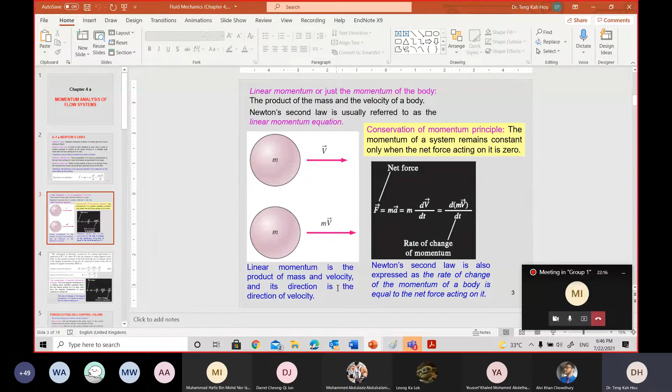So all these things about the theory, you need Newton's laws, first law, second law, third law. And of course, in these momentums, we apply Newton's second law. After that, we need to know what the energy changes are in our engineering application, so they use the conservation of momentum principle. This is general information for this chapter.

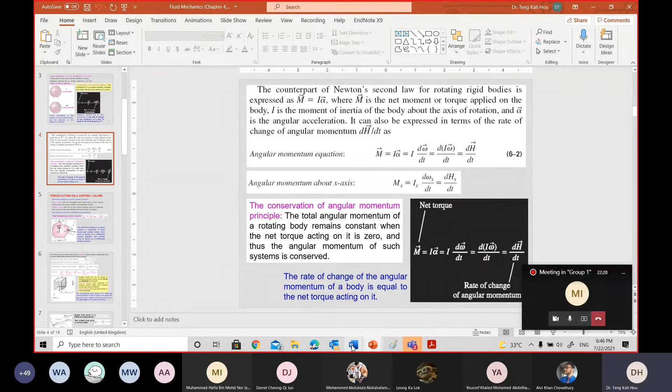So from there, I passed the angular first because we are going to go through that later. So as I mentioned, when you got the momentums, conservation of momentum, definitely the case will be put into linear and angular. I did explain to you last class what makes it different, because in the question, it wouldn't directly ask you please calculate the linear momentums for my case, or please calculate the angular momentums for my case. When you look at the question, you need to identify whether we are talking about linear momentums or angular momentums. I think I highlighted that in one of our previous classes, am I right?

So one very good example is this example, am I right? So we've gone through this example. This kind of question can be asked either as linear momentums or angular momentums, am I right? Depends what the question wants. For this case, they want the bending moments, so these keywords give you the idea, oh, I know this is angular momentum. But if the question asks something like anchoring force in between, just like this, my anchoring force determines the gas pressure or whatever, or the anchoring force needed to hold or whatever inside this system, all this will lead to your linear momentum.

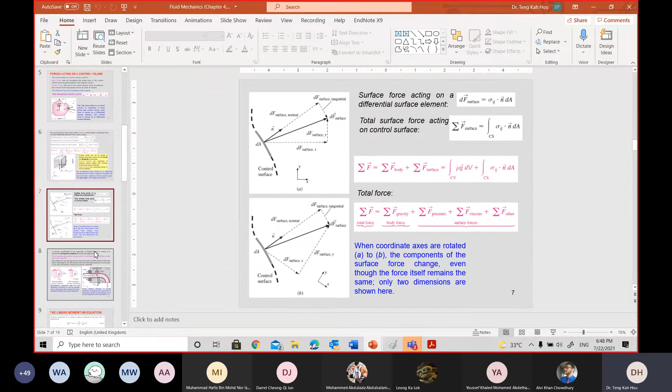Okay, so just quickly go back to that. And as I said, I don't expect you to derive the thing, so don't worry about that. But what I expect is that you need to understand the system, for example this. Have you gone through this? Yep, I think we've gone through this, right?

But in this case, I want to highlight that my pressure gauge 1 and pressure gauge 2 have gravitational effects, so it's pointing down. Make sure you are familiar with all the directions of the forces, and not all the time can your questions ignore the gravitational force. Do you get what I mean, class?

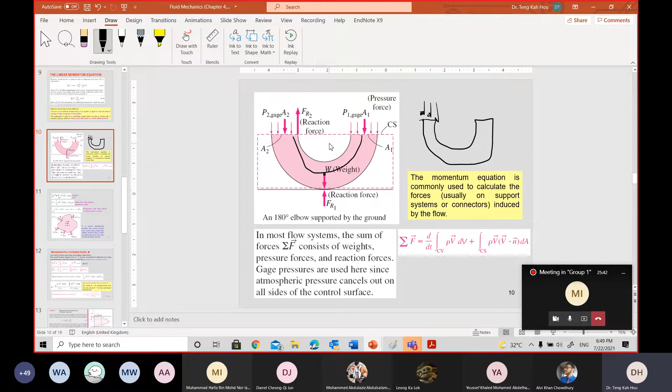Yes, sir. Yep, so in case you got something like this, you need to be careful that even though this is your inlet, let's say coming in from here and going out from there, your outlet pressure will be a negative value due to the gravitational force. So these kinds of things you need to analyze and understand the condition. But if the question mentions, just like your tutorial question or sample question, to ignore the gravitational force or whatever, then of course all these things will not affect you, you just follow whatever that is.

Okay, I'll go through this later on very quickly. So again, just to highlight that all the forces must be a summation, just like in this case you've got 1, 2 inlets and 3 outlets, so all the things must be in a summation condition. Okay, no question, right? Okay.

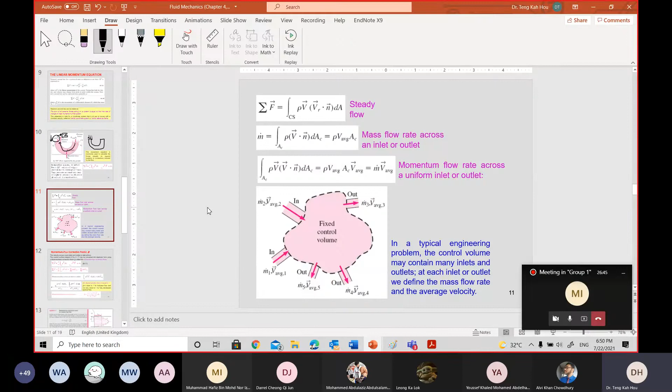So continue. And this is the beta I mentioned, so this is the formula you need to be aware of. In case your examination asks and this is not given, make sure you know what the requirements are for the beta integration. For example, in this case, you need to use 1 over Ac integrate V over V average or whatever. So make sure you know what this is and how you get the beta. I think we have gone through the discussion very well.

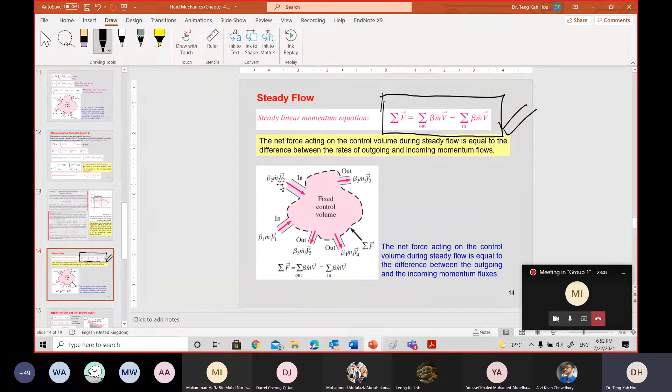Okay, so again this is the thing I highlight, this is the thing you must know. And why all these things? That's why for those who have a very strong static and dynamic knowledge, you might get confused, because whatever force is working here, to obey the momentum equation, everything must obey these rules, which slightly goes against your dynamics condition, right? And for those who have started, I guess you get what I mean. But remember, always remember to apply these rules when you want to calculate the system energy. Okay, so this is done, and this is a sample we've gone through. So, yep, for linear, is that clear?

For the linear momentum, is that clear? Any question you want to ask?

One question. Can you go to example 1 of the slides? The first example where we used to find beta. I'm only confused about there are two V's. One is V with the vector sign, the other one is also V. What are the names? You see, we have two V's at the top, so which one is what? I'm actually confused, it's all good, but that's my question.

One is V average, one is V. Both of them are velocities. Yes, both of them is velocity. So what this formula tells you, this relates the velocity using the average velocity to tell you the whole story. So it's a relationship between the velocity average, how it's moved, and how the radius changes your final velocity.

Both velocity, yeah, both also velocity. But because this V is the overall parabolic shape, am I right? So they need information of how the things move and how the radius change. So it's a relationship of all these things that contribute to your final velocity profile of your liquid.

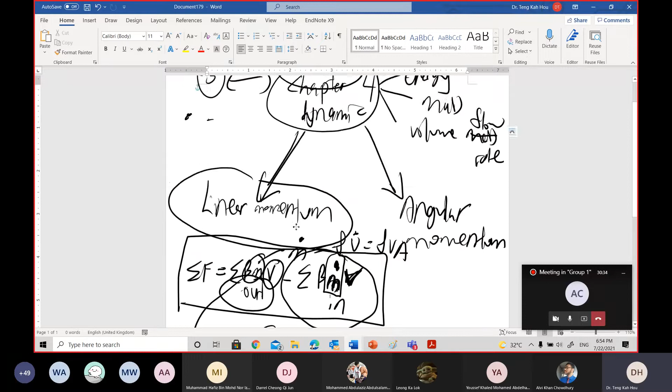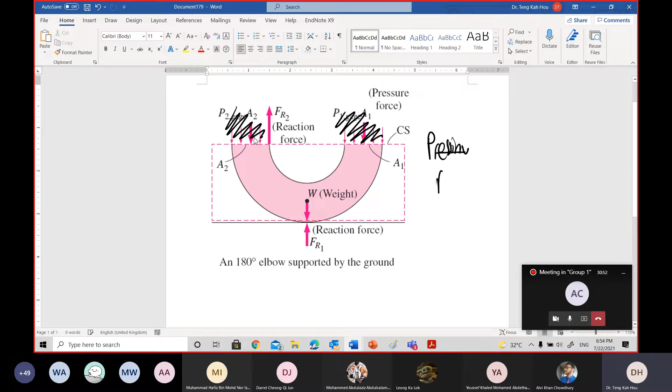So if the question, just assume this is non-marked, because this diagram already gives you, assume it's not given. If the question asks, I got pressure inlet over here, and I got pressure outlet, let's say equal to 10 kilopascal. My pressure outlet equal to 20 kilopascal.

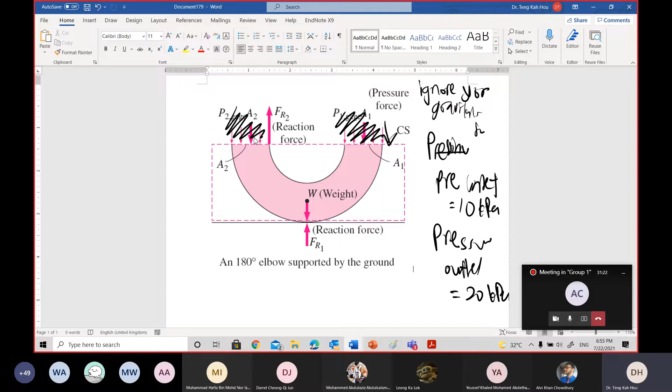Okay, so if the question mentions ignore the gravitational force, so your inlet will go here and go out. So your P1 gauge will be pointing down because it's inlet this direction. Going out, the P2 will point out, if the question asks you to ignore your gravitational consideration.

So second case, if the question didn't mention you can ignore all this gravitational force, so your P1 will be, as usual, against your inlet. But your P2, when you're going out, your P2 will still be pointing down, just like this case, because you need to consider the gravitational force.

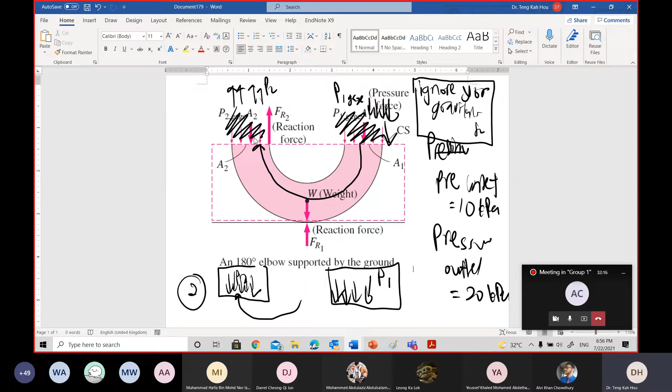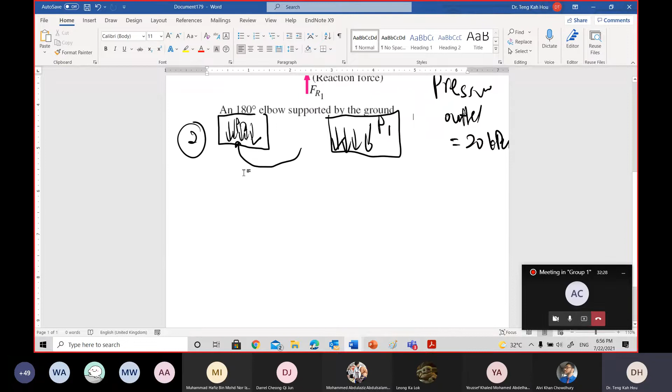Do you get what I mean, class? Yes or no, class? Yes, sir. Yep, so this is the thing, as I said, is an analysis of your understanding, just like this question. Okay, do a quick one.

Right, so for this, what they ask you to ignore. Okay, because it's mentioned going in from one direction, right? And they didn't ask you for the outlet pressure. Okay, they didn't ask you what is my P2 pressure, am I right?

If the question gives you also my P2 pressure is equal to some value, let's say what the value they're given here. Oops, let's say it's about 20 kilopascal. Okay, and the question says neglect the gravitational force, so your P2 will point it outwards.

Okay, so in case they didn't ask you to neglect, so your P2 will point it inwards due to the gravity. Do you get what I mean, class? Yes, sir. Yep, so, but again, don't worry on that.

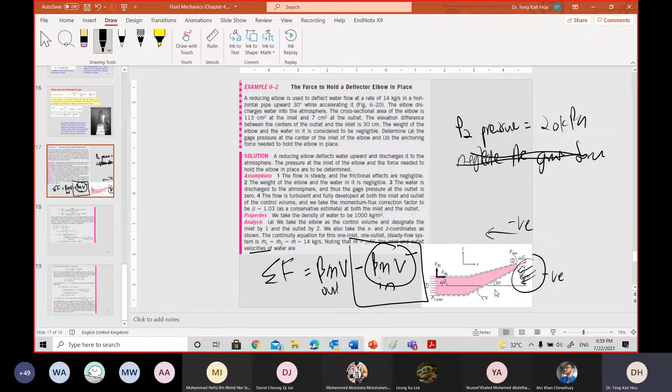Because when this is negative value, minus minus becomes plus, or minus plus becomes minus, or whatever, vice versa. So please be careful on this formula. This thing makes you confused, but if you're familiar with what is going on, it should be fine.

Okay, so any further question? So if inward, you assume it's negative. Yes, exactly. So since you know that the direction is going inside, right? So you just assume negative.

Okay, the P can only be neglected if it's the same as ATM, right? So, yeah, it depends on the question - whether the question tells you that it's pressure inlet or pressure outlet or whatever. If the question didn't mention it, then you just ignore it. Don't put your head into that.

Because sometimes the question will ask you, does a pressure inlet contribute to the forces? So as I briefed in early class, right, all the pressure is also one of the forces, because pressure equals F over A, and PA is the force. So if not, then it's fine, don't worry about that.

The P can only be neglected if there is... yep, because if the outlet is P atmosphere, just like your case, you will get a P1 gauge. Am I right? Because your P inlet minus your P atmosphere is the P1 gauge. I think we learned through this example, right? Just go through it again to understand that.

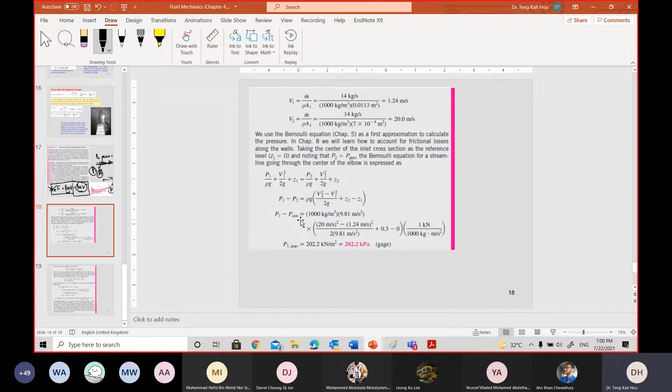But as I said, not all the times is everything so nicely arranged for you. Sometimes we just let you know that P1 is a certain value, P2 is another value, just like this diagram. It gives you directly what is my value for that. So how you're going to calculate that is totally up to you, how to put this in a way that

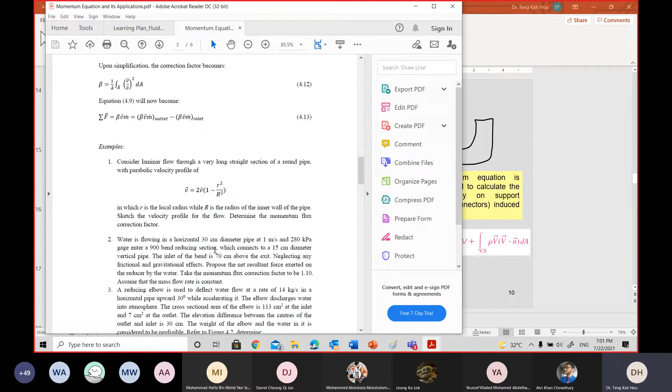complies with the formulas. Okay, so let's go through the example. So in this case, I think there's no issue. Let me just open my answer as well. So let's go through it, and I hope you have tried all the questions, right? That's the only way you can strengthen your understanding. There's no shortcuts.

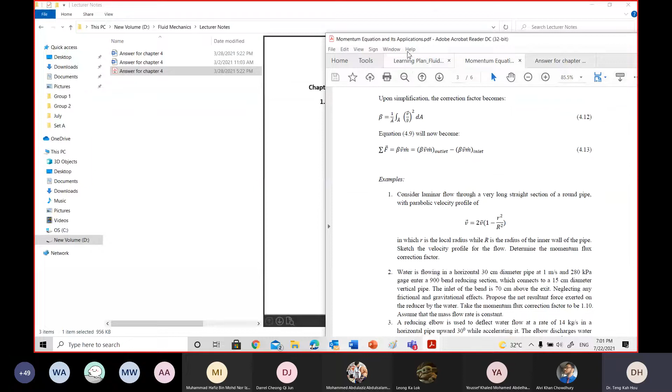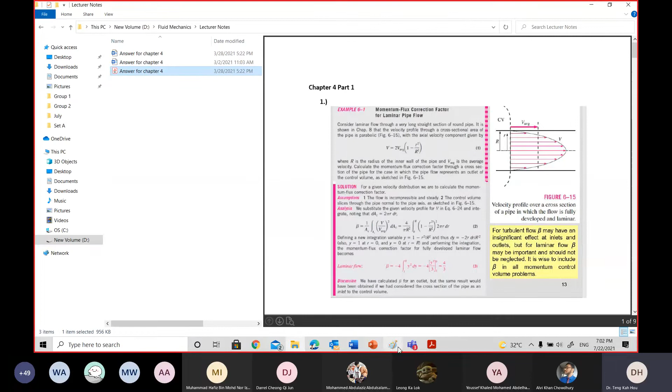Okay, so for question 1, I think there's no issue because again it's your momentum flux question - how to use this to derive, not to say derive, to get your... where's my thing? Okay, how to use your velocity profile to get your momentum flux. So as I said, the question can be asked in a lot of different ways.

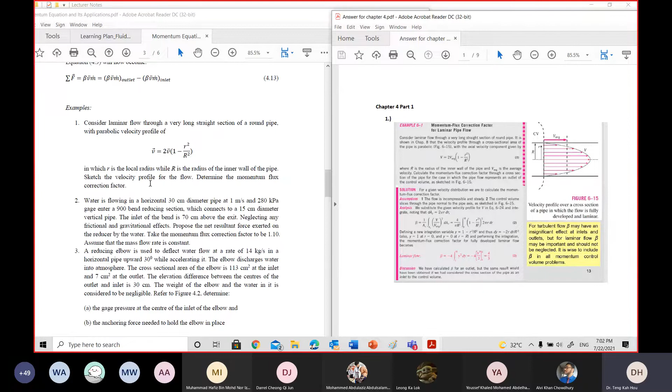For example, section A, please get me the momentum flux correction factor by using a certain value or whatever. After that, it can ask you to use the beta in the following question, just like question 2. Sorry for my mistake on question 2 - yes, you are right, some of the students noticed. If you solve question 2, you realize that, and also this mistake, it's a 90-degree bend.

It's a 90-degree tangent. So you got all the diameters, radius, velocity, and in this case you got the P1 gauge entering your pipe. And the tricky part for this question: the inlet of the bend is 70 cm above... Supposedly, when you look at this, what do you need to do?

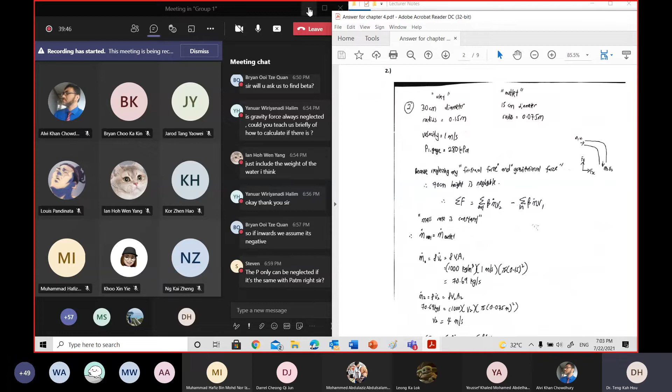Bernoulli equation, am I right? When you look at this, I got the potential energy... where's this? When you look at this, I got the, where's the thing? I got the inlet of the bend is 70 cm above the exit. That is 70 cm difference in height, am I right?

Yes sir, yep. And in this case, why is my answer not including that? That's because the question asks you to neglect all frictional and gravitational effects. But I would say this is just a tricky part of the question, and hence that's why you don't have to consider this 70 cm, because your gravitational effect won't give you any effect

further on this height. That's why you just assume that it's just a smooth flow on that. Okay, and then you just use the formulas to get your Fx and Fy. But that's right, I forgot to include your pressure one gauge. So in fact, for your Fx, you need to consider you have the pressure inlet, and then you should be able to get the answer. Is that clear?

Yes sir, yep. I need a lot of communication in the groups where I don't see much, right? Sir, yep, here for this question, we can see that you have used the m dot - it is the same for both inlet and outlet, right? Yep, because this assumes the mass flow rate is constant, given by the text. That's why all the flow rate in this condition is similar.

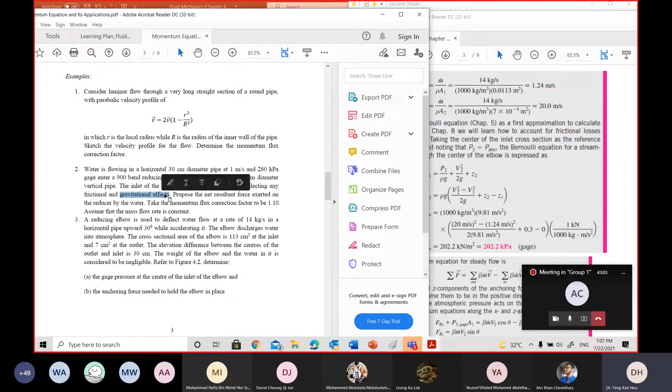So you don't need to consider this for the evaluation. This is right, that's why I wrote here - oops, where's my answer? Because they ask you to neglect the gravitational force, that's why your 70 cm height is neglected. You don't have to consider that. That's why I didn't use the Bernoulli equation to solve this.

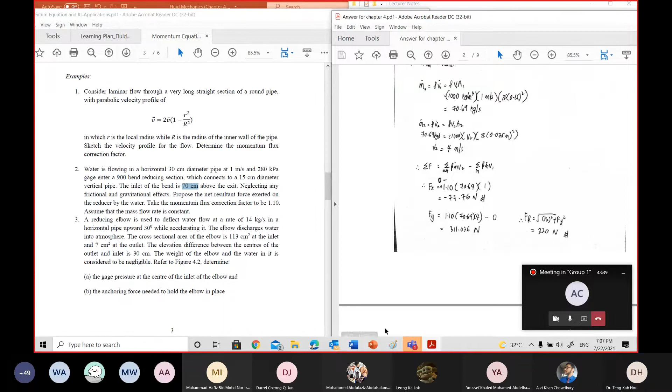But because you got the inlet of 280 kilopascal, so from here you need to minus, maybe a new one.

Yes sir, in this diagram you only have one horizontal, one vertical. So your Fx is 0 minus your... 1.10, 70.69, which is already in there. Don't forget, so this is a mistake for that, right?

You need to add your pressure outlet - I mean the pressure inlet, P1 gauge. Where your P1 gauge is 280 kilopascal, am I right? But you are not adding this directly, you're adding P equal to F over A. You need P times A to know the forces here. So P1 gauge times the area gives you the final answer for that.

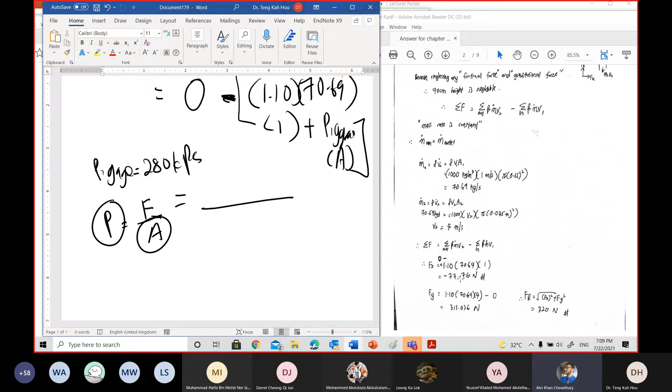It's okay. Yes sir, I did exactly like this for mine. Yep, so once you get Fx as a different value, of course you get a different Fr by using the formula. And also you need to add in the angles. Don't forget for that - they will carry some marks as well.

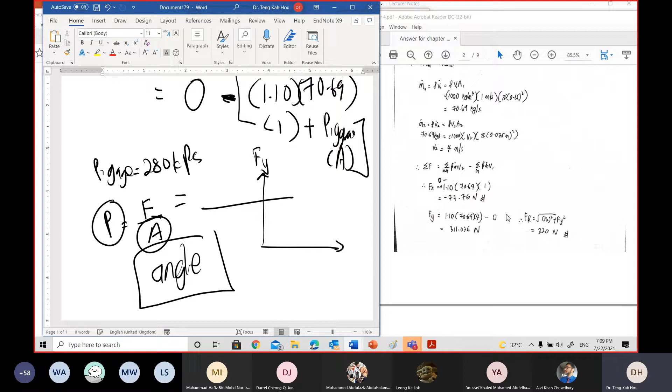You know, so how do we get the angles, right? Because once you get the... oops, this is the thing - Fy, Fx, and here is your Fr. These angles you need to include all the time as well. I think it's the same as your question 3 later on.

Yep, is that clear? Oops, where's my... sir, question 3 doesn't include any angles. Yep, that's why I said you need to include that. Because during the class I think I explained to you, right? Even though the given answer doesn't include anything, please include this - it's a package for you to get the resultant force with the angle. This is normally what you learn in dynamics, am I right?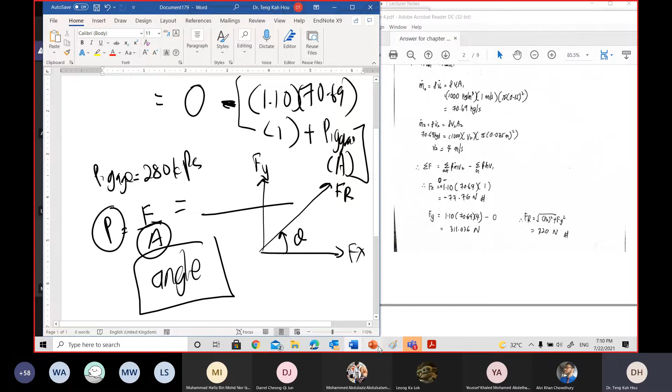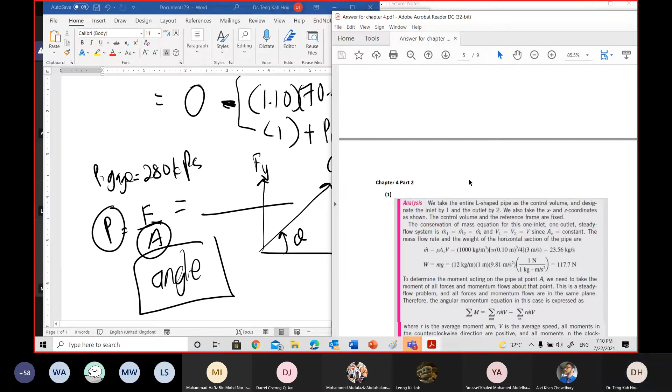Yes sir. Okay, so question 3 I think is an example - you see the given answer doesn't have the angle, but please include that. I think during the class I did explain that, please include the angle as well. Okay, so that's part 1.

So for part 1 it's okay. For the linear one, it's quite straightforward, am I right? Yes sir. Okay, so any questions, class? Are you with me?

Pressure at outlets should contribute to the overall resultant force. No, the pressure outlet should contribute to the MV2, the outlet. That's why you got the formula for MV out and MV in, right? If it's the outlet, that's why it contributes over here. If it's the inlet, it contributes over here. So please be careful when you apply this formula.

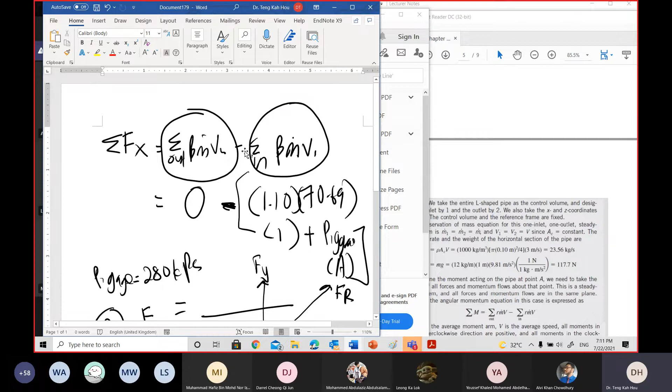Okay, Stephen, did I answer your question? Yep. Stephen, are you there?

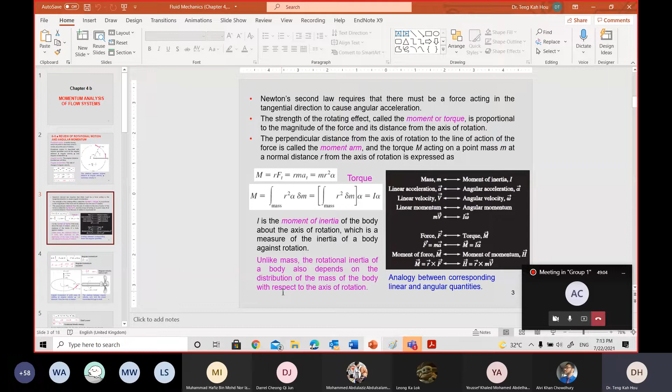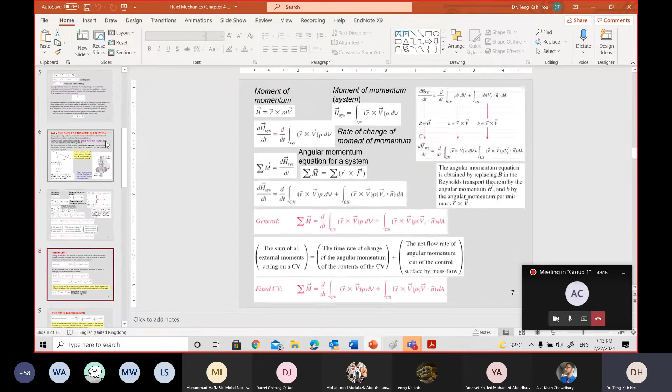Okay, so come back to this angular. As I mentioned, the key things you need to know, we'll go through this first. Key thing you need to know, of course, is this formula. Make sure you're familiar with this. All the angular momentums talk about this: Rm dot v minus Rm dot v. So the key thing, the idea is still the same.

Energy changes in your system, right? How this changes, and I would say the idea is not difficult to understand, but the thing is your positive and negative sign will make you very confused. And that's why I mentioned, if you're not really sure on that, you need to revise all the statics and dynamics fundamentals to make it happen, because in this case fluid mechanics only teaches you this. But again, all these things are your fundamentals, all the forces' direction, how the force goes here and there, is the fundamental of your statics or dynamics.

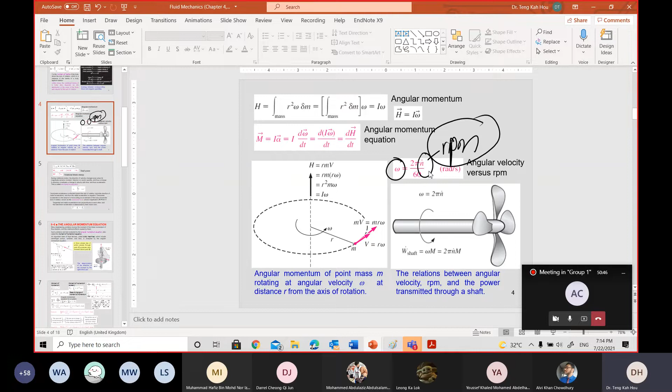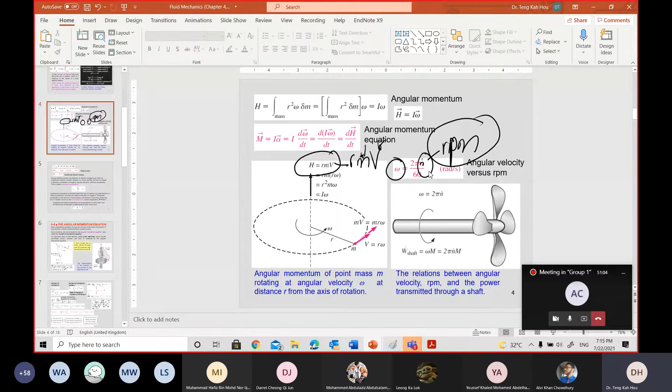Okay so this is the thing you need to know, and this is just another thing. Omega, as I mentioned, not all the time the question will give you omega, or the question either will give you RPM or whatever. They can ask you in a lot of different forms. Since you have gone through so many, that's why you know the final format is RMV. But in case they are not giving you any of this information, where do you get this? Sometimes they give you omega, sometimes they give you RPM. You need to know how to get all this information.

Finally, contribute back to your equation of this. I think we learned during the class, am I right? Can you recall class? Yes, sir. Yep. Okay, so that kind of thing is very important.

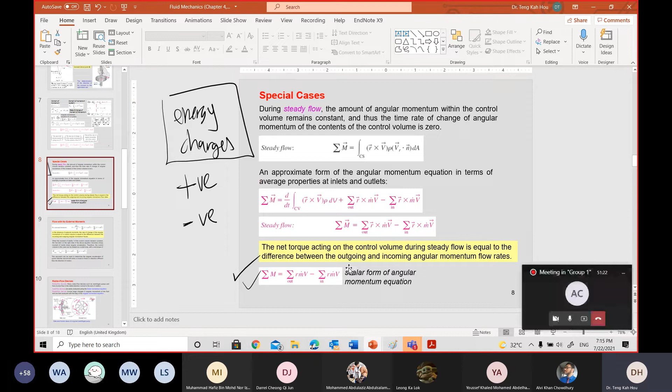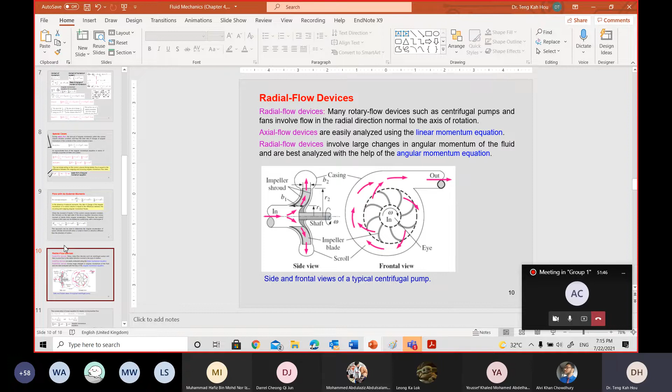Okay, so after that, that's all for the angular momentums. But what's add-on for this is the special case about the radial flow device, because in this case it's a combination of your angular momentum and also linear momentums. But this is a formula as I mentioned previously, right? Make sure that you know what is your volume flow rate for this case. We are talking about the cylinder's cross-section area. Okay, but anyway, at the end, as I said, we still obey this thing. Why this happens is because the question can ask in a lot of different ways for you to get the information you want to fit in.

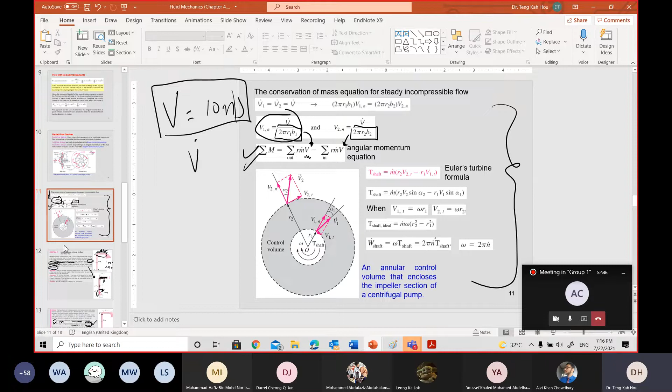Okay, because I would say that the question won't tell you exactly this is my V given to you, my V is talking about 10 meters per second. No, there's no chance. All these V you need to source from somewhere, where they come from. For example, in this case, I give you a volume flow rate, then you need to get me what is my velocity. Or I give you omega or whatever, how do you link back to my mass flow rate or whatever. So all these things you need to know. And as I said, at the end, the question might ask you to calculate what is my shaft force. So this is very important for chapter 4.

Okay, so this is the two examples we've gone through. As I said, for this case, it's because the question wants to measure the bending moments on point A. That's why all the things change into the angular momentums. In case if the question is not asking that way, it will be very similar to your question 2, am I right? One inlet, one outlet, I want to know only the angular force Fy, Fx, and my Fr. So the question can be tricky, but in this case they want to know the bending moments for this.

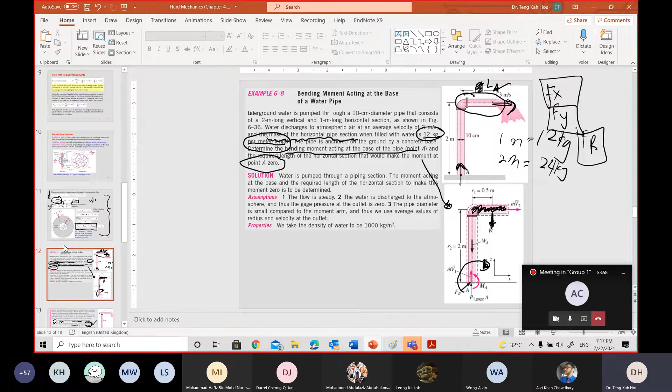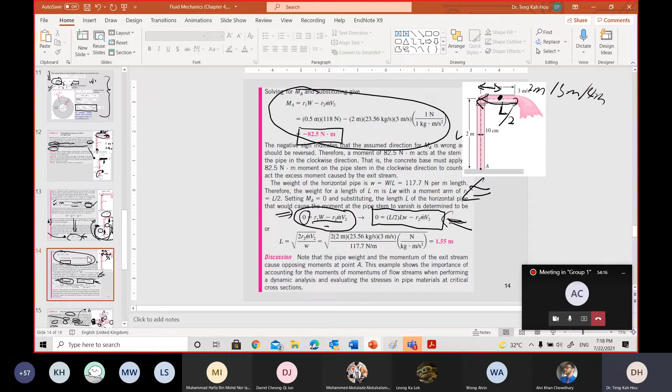Hence, all the solution, I think we have gone through in very detail. I already briefed you why there's a positive that can change to negative or level. I hope you revise that. And this is the reason all these things happen. Okay, and second case.

Sir, yes, I have one question here. I understood everything, how everything works, but I don't understand the concept. Why are we subtracting the nozzle velocity from the jet velocity? I tried it a lot. I know how to do it, but I don't know why it's minus.

Because it's a net force, as I mentioned, right? I think I explained this as well, am I right? So in this case, you're talking about here, right? Yes sir, I saw your recorded video, but I still wasn't clear on V jet minus V nozzle. Why do you need to write that?

Because you got something spreading outside, let me explain again. You got something velocity spreading outside, and due to this spreading, your thing is moving backwards. So this V jet is getting your net velocity or net resulting velocity. This is the velocity that contributes to the whole system energy. Do you get what I mean?

So as the water goes out of the jet, the water gets a backward force, right? Yes, so that makes the velocity of the nozzle. Yes. That's why over here you use the net velocity to calculate what is the shaft energy available.

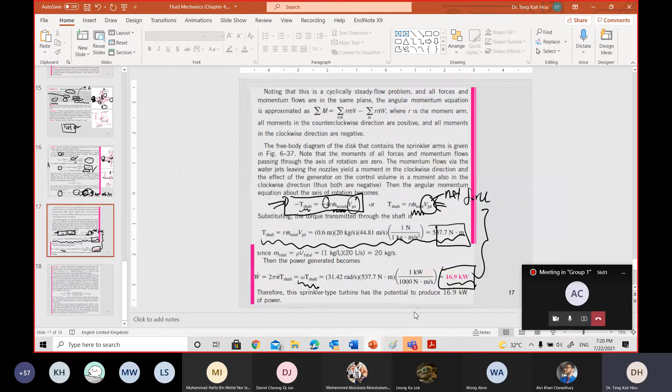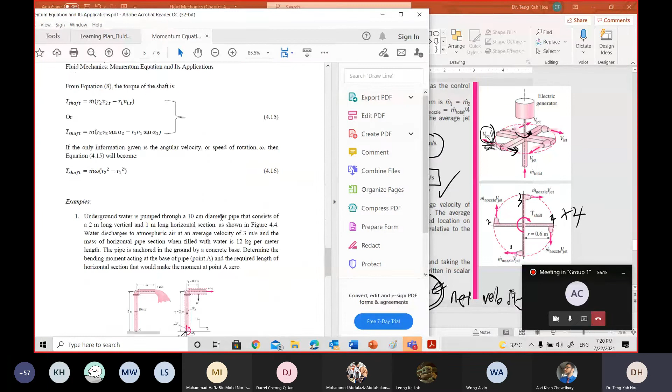Okay, so your question 3. Just let me see, what is this? Okay, don't worry about that, because in this case you don't know what the pressure is, am I right? So the answer is using rho RT, which you learn in your thermodynamics. If this kind of question is asked during the examination, I'll make sure the formula is provided.

But more importantly, you need to know what is your shaft energy contributing to your torque. So you have this MRV, is that too small? So R2V2 minus R1V1, okay, because you've got the impeller turning. So from there, you can use all the formulas I mentioned just now on this page.

It's totally, when you talk about the radial flow device, this is the information you must know how to do. Because from all these things, you can know what is the contribution of the torque, and after that, you can easily get the velocity or shaft power level.

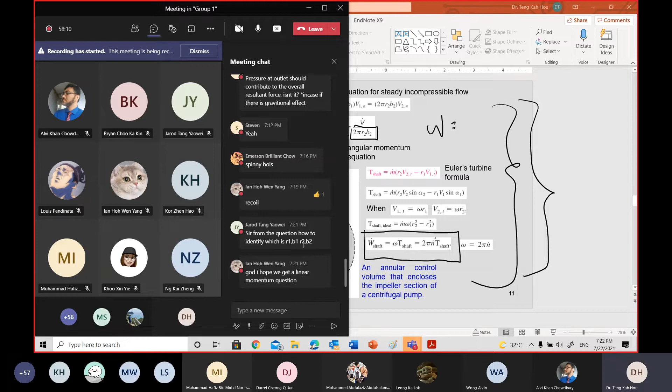Helps, yeah. How to identify which one is R1, V1, R2, V2? Okay, you mean for this B2 or V2, are you mentioning it? Okay, so let's go through the question.

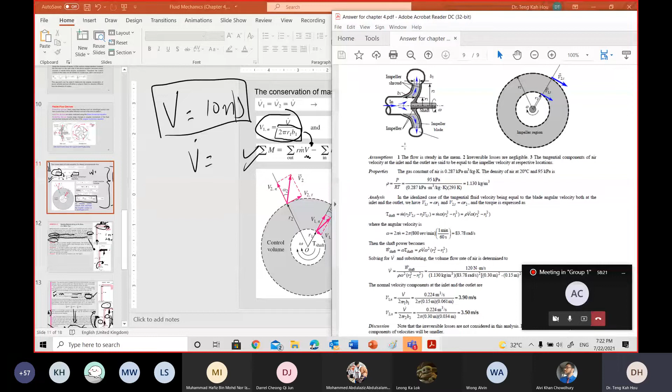Okay, because you've got the inlets and outlets, right? So generally your inlet will be referring to case 1, R1, V1, and your outlet is R2, V2. So this is how they define it. So R1, V1 and R2, V2 represent the in and outlets. So this is the case.

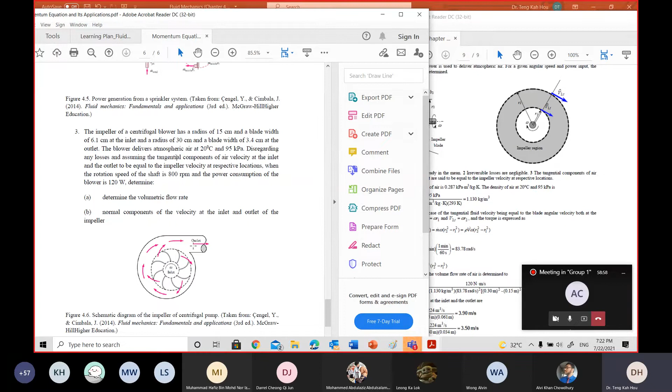So when you look at this, it's using your outlet minus your inlet. So from here, inlet at 15 cm, outlet at 30 cm. So the idea would be like your summation of the moment. Okay, so you try that. In this case, it asks you to calculate what is the velocity for that.

And have you tried the question? Yes sir, one question. So this one, there was no density given, so I had to see your solution then solve. Yes, that's why, as I said, this case, because they're asking you to use the different pressure, which is thermodynamics. If this is asked in the examination, I'll make sure the formula is provided, or I will let you know where the density is.

Thank you so much, sir. Okay, so this one is somehow slightly out of your scope, but anyway, if the question asks, I'll make sure the density is there. Because you're just lacking the density information for you to go forward. Other than that, everything else is still the same.

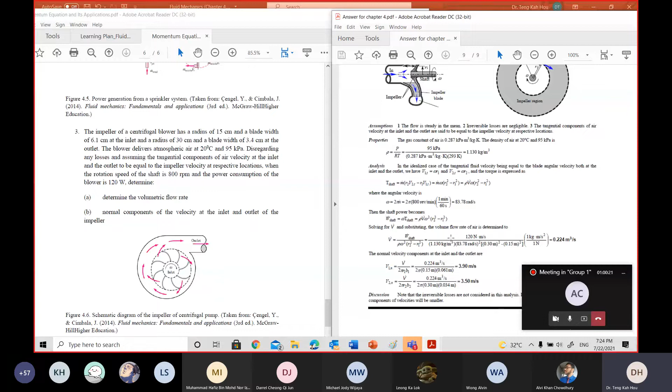Okay, so that's all for chapter 4. Any question? To be honest, I forget the question has been set previously, and I forget whether it's linear or momentum. I didn't really go and check it, but I would say that definitely within the syllabus, and you know what is going on, you should be able to solve it.

Okay, any questions you want to ask? No, sir. Okay.

If the tube is half circle, we use linear or angular. And Nico, I didn't really get what you mean. How the tube is half circle. Maybe can you further explain or elaborate? No, just like this, if the question is talking about the tube being half only, like this one, then it should be using linear or angular. So it depends on how the question asks.

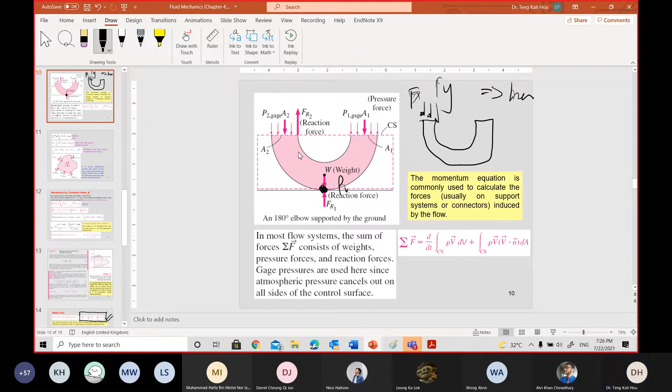If the question wants to know where my anchoring force is, Fx or Fy or whatever, for this case definitely they're going to use linear. If the question wants to know the moment at this point, then it will become angular, am I right?

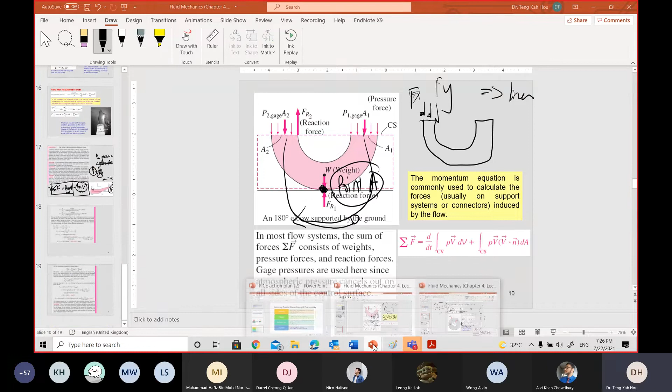Yep, so that's why I said you need to understand how tricky the question can be asked. As I said, this question can be asked in linear as well, just like your example 2 you solved. Because it's exactly the same thing, 90-degree bends, and you just want to know the net resultant force. But for this case, it's purposely asking for bending moment at point A, so you have no choice but to go for angular.

So did I answer your question? Yeah, thank you sir. Okay, thank you sir. Yeah, no worries.

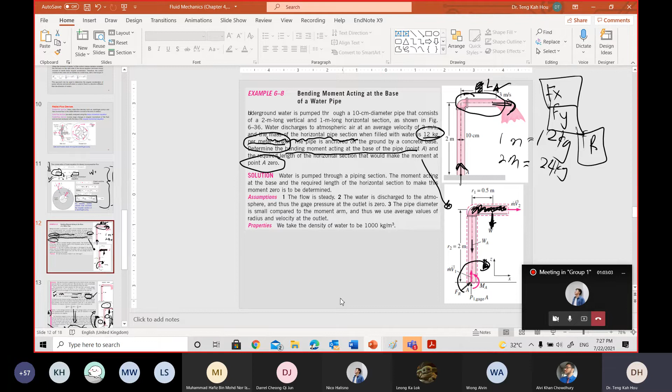So again, revise and revise, that's the only way. Not much extra information I can give at the moment, sorry for that.

So any further question for chapter 4 before I proceed to chapter 5? Chapter 5, I would think, is very simple and straightforward, it wouldn't take more than half an hour or whatever. Any question for chapter 4 before I proceed?

Okay, so silence. Anyway, if no question, I will proceed. So in chapter 5, as I mentioned, you learn only 3 things, am I right?

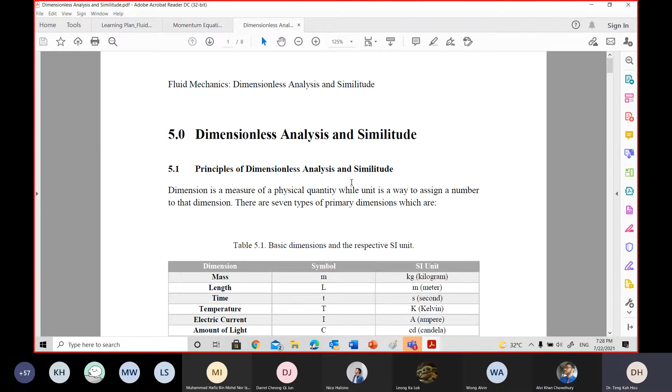What are the 3 things I highlighted? Can someone let me know? Sir, there are 6 steps for the Buckingham-Pi theorem. Yep, Buckingham-Pi theorem is one of it. But in the whole chapter 5, we learn only 3 things, am I right? If you can recall what we have learned in chapter 5.

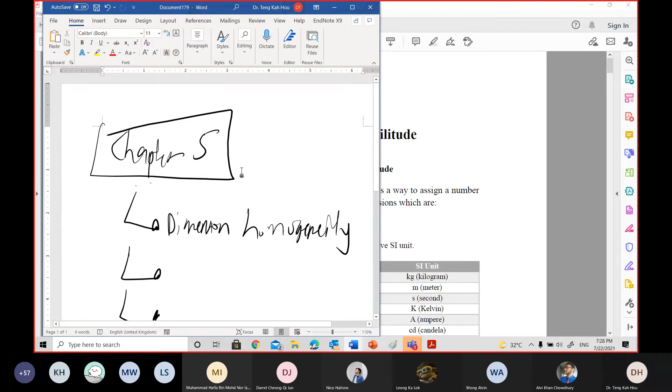We only highlight 3 things. What is the first one? Dimensional homogeneity, am I right? To prove your equation has similar dimensions, dimensional homogeneity.

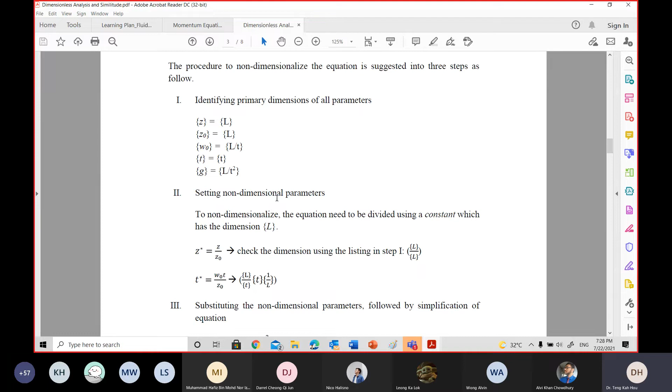Second is your non-dimensionalization. But in this case, as I said, the limitation for this is the question must be easy enough for you to divide by themselves to get your dimensionless terms. And as I mentioned, this rarely happens because it's not practical.

And finally, you learn the Buckingham-Pi theorem. Can I just ask you to revise again, get your paper, 1 minute, write down the steps please.

Okay, so your step would be first, identify all the parameters. If I write down, right with you, first step. Can you recall how many steps? That's more important.

For those who are not responding: first, we have to find the total number of parameters, n. Okay, for others, are you sure? 5 steps? Only 5 steps? Are you sure?

But anyway, that's 5 or 6, depends how you read that. Okay, first, I will call it n. Not to say identify, write down all the parameters.

Okay, second step. Where's the second step? Find j, yup, get your j. Identify all the main parameters, for example you got M, L, T or whatever, depends on your given symbols.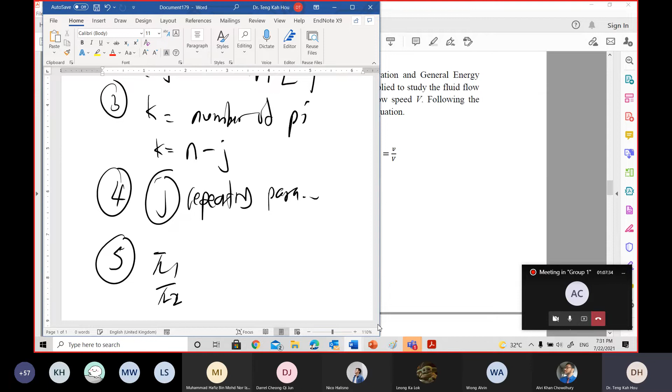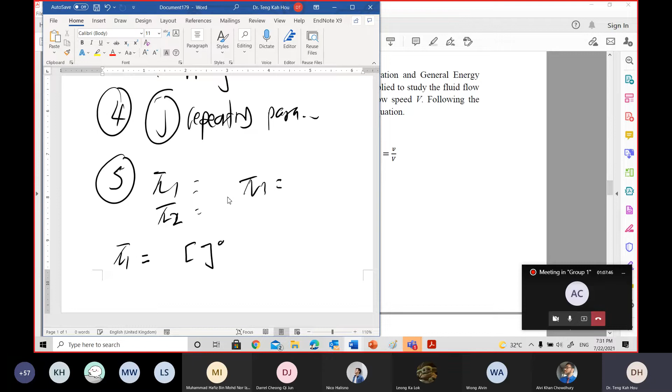Because I think if you try the question, you know what I mean. At the end, you need to write down all your pi 1, pi 2, pi 3, etc. In order to write this, you need to make sure pi 1 equals something A1, something B1, and something with the non-repeating term. Then pi 2 happens again, pi 3 happens again. So once you get all the values for A1 and B1, substitute back to get your pi value. So this is what you did, am I right? And finally, that's step 6.

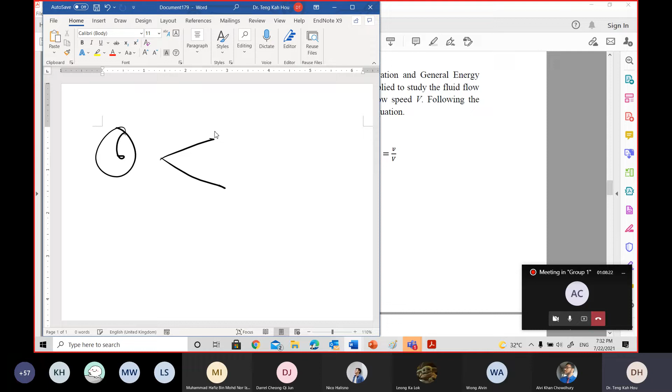So step 6 is quite critical. If you can recall what I mentioned, there are 2 possibilities. One, the question asks you to prove my formulas in that format. So you can rearrange all the things, pi1 equal to pi2 divided by pi3, or pi2 plus pi3, whatever. Rearrange all the formula to fit into the given formula. If the question didn't ask you to prove, didn't show you what is the final format, you can always write pi1 equal to function of pi2 and pi3 or whatever. Can you all recall this?

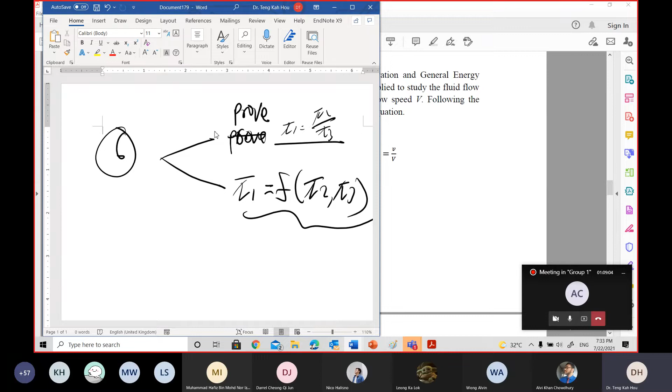Yes sir. How many of you couldn't recall this? Six, yeah. So I would say that this is really important, okay? Please make sure you know this. So recall, good. For others who are not respondents, can I get some feedback please? Are you with me? As I said, you need to revise that. I know for today's class I went through it like a rocket. That's why I urge you, you must do a revision, else you will have difficulty understanding what I'm telling you today. I'm confident that for those who have revised, you totally agree with me. What I'm doing right now, you need to already know that in order to understand what I'm telling you. Okay good, so for those who have already done, and for those who are not responding, I hope you get my message well. If you haven't started any revision, please start immediately after today's class.

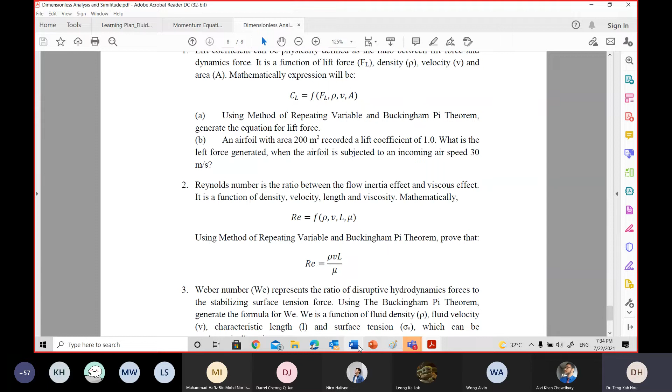Okay, so we go through the question. This is not important, I directly go through the Buckingham-Pi theorem. In the Buckingham-Pi theorem, we have gone through question 2, right? We have learned how to use that method. That's why this is proven, asking you to prove in this format. If you can recall, we got the format we want, pi1 equal to... Let me write for you. Yes sir. So what you get for that is, if you can recall the answer we have, you get pi1 equal to RE.

However, your pi2 you get is mu over rho VL. So in fact, if the question didn't give you this, you can write your answer as RE equal to function of mu over rho VL. It's fine if the question is not asking you to put it in this way. But the question asks you to prove it, that's why there's no choice. You need to put pi1 equal to 1 over pi2. And I explained to you why: what the Buckingham-Pi theorem tells you is only to get the dimensionless equation, but it didn't tell you what is the arrangement of the formula, unless they specify ask you to prove it. So in this case, since they ask you to prove it, you will get this RE equal to rho VL over mu.

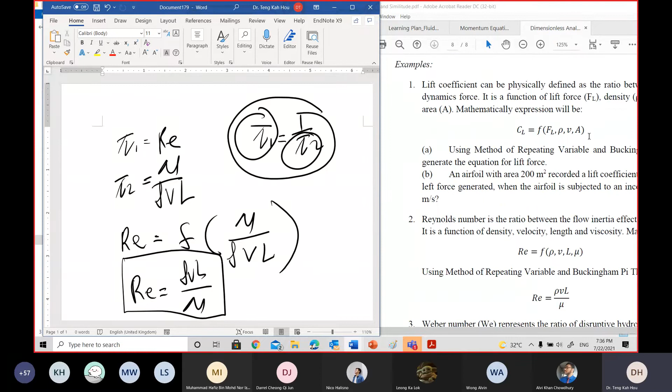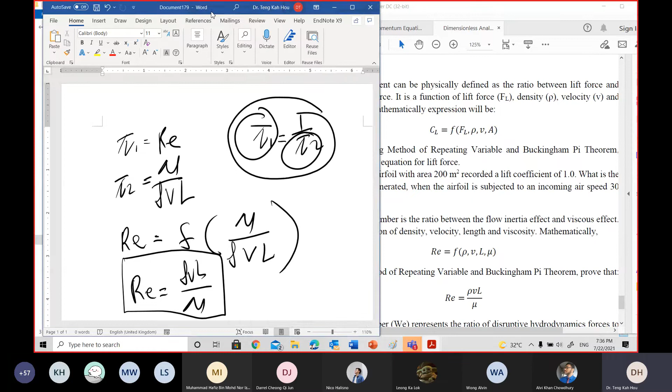For example, question 1, I think I explained in class as well. In question 1, the question didn't ask you to prove what is the final formula for this lift coefficient, am I right? So what you get, let me show my answer. I know there's some confusion, but I thought I explained in class - no worry, I will repeat again now.

Okay, so have you done all the steps, step 1, step 2, step 3, until the end? You get this: CL equal to F, FL over rho V square A. So for those who have solved, you're able to get this, am I right? Yes or no class? Yes sir. But your and my equation is a bit different. Yeah, but anyway, so this is a function we have - the relationship between your coefficient with my pi1 and pi2.

So when it comes to question 2, why did I use this formula? Because I searched online, that's why I mentioned in class. In part 2, you need the exact formula for you to solve the question. Because for this one, as I mentioned, this is not the final format of the formula because you don't know what is the exact formula. But of course, during the examination, don't worry about that. If I want you to prove for any numbering, I will give you the final format to use, the standardized format. But in this case, I got it from online. I know that my lift coefficient equal to FL divided by half rho V square A. So I just substitute accordingly and I'll get the answer for this.

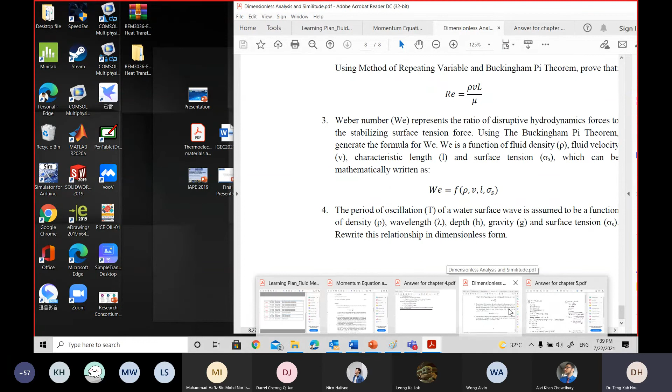Anyway, for the whole Buckingham Pi theorem, everything is about your steps, and I think I got a mistake somewhere for the last question. Am I right? Yep, I think I got a mistake for this, because the reason I highlight this, if you put one of the wrong dimension, the whole thing will go wrong.

And I would say that, yep, one thing for the t - for example, for the t I put it as a parameter, but here you use dimensionless, so I changed this, this is my mistake. This is my mistake. So just for this, this is the tricky part I put in the answer.

If you have done it, you should be aware of this. That's why I want to highlight that if, for example, in the second step you put wrongly for one of these, your whole thing will be ruined. I want you all to know how serious that is.

That's why please double check or triple check your answer, because for chapter 5, you either score full marks, full 20 marks, or that's all. If you make any mistakes, you are going to lose quite significant marks here and there when you put things wrongly. So I urge you, when you do the chapter 5 questions, please double check or triple check - there should be no mistakes, no error, whatever.

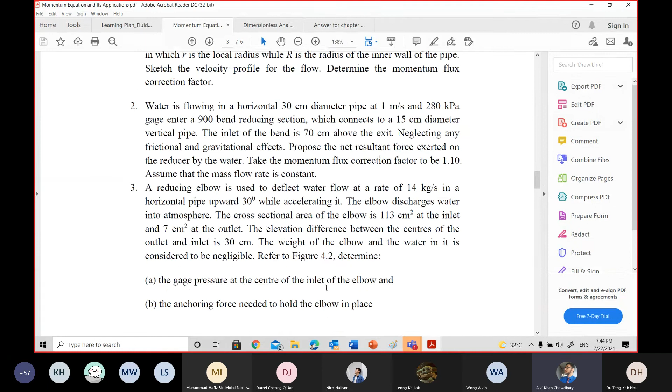Sir, one last question. For chapter 5, sometimes it's confusing what is the main parameter, like this function We equals f, and also it's sometimes confusing whether it is dimensionless or not. Like in example 4, I thought it was t, but then you made it just as an example, so how do we know whether the parameters are dimensionless or not?

Okay, so you need to read the question carefully and you need to strengthen your basics. For example, question 3, let me give you a trick. Question 2, Reynolds number is the ratio between things. When you see these keywords, ratio between things, you know this is referring to dimensionless. And Weber number represents the ratio of something, so you know Weber number is dimensionless.

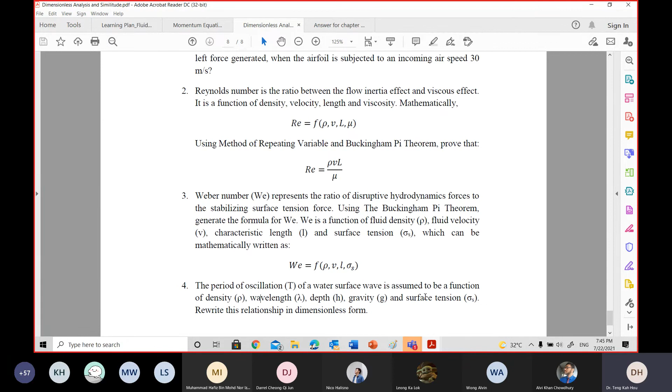And this is the period of oscillation. What is period of oscillation? It is time, t. Yep, that's why you need to put t. But my answer put in dimensionless, and you should fill in, that's not right, am I right? So that's why I ask you this, I can't just tell you what this is because you need to know this is fundamental. You need to know the density, as I mentioned in last class or previous classes.

Density, you need to know the formula for that. Wavelength, depth, gravity, surface tension, and then, let's say, your viscosity. All these are quite common dimensions you should be aware of. This is all I can say.

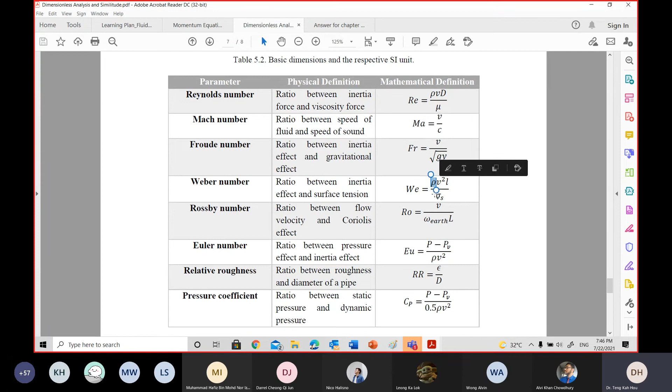So my suggestion is to spend some time going through these basic dimensions, all these things, and try to make yourself aware of what we are referring to here, pi or whatever, because all these Buckingham pi theorem applications are very limited to a big group of variables. For example, P whatever you're referring to, rho whatever you're referring to. So try to enlarge your knowledge, a knowledge storage for all these dimensions, and then you should be fine.

Is that all right? Yes, sir. Okay, so any further question before I let you go? From others, anyone, anything you want to ask further? Why so quiet? Okay, good, yep, thank you.

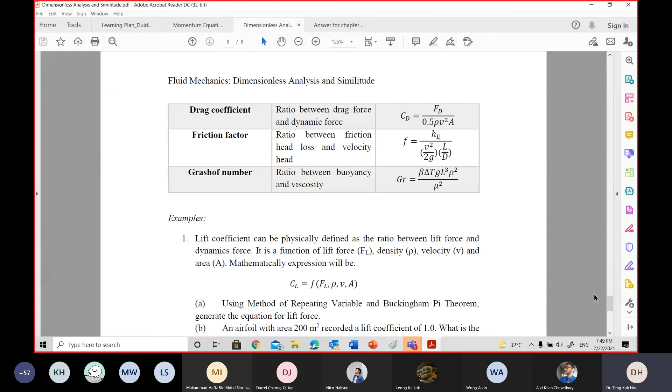Yes, sir. Okay, sir, one thing. So for the main parameters, mainly we are going to have length, mass, and time, or anything more than that? That's why you need to go through it, anything can happen. In your slide you got 7, am I right? Yes, sir. 7, is it 7? Anything can happen, you just get ready yourself. All right, sir, thank you so much.